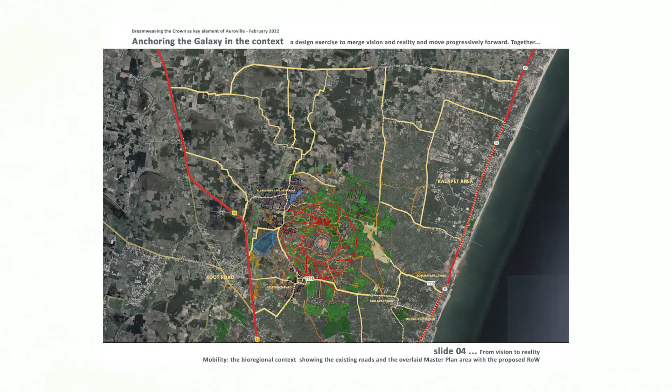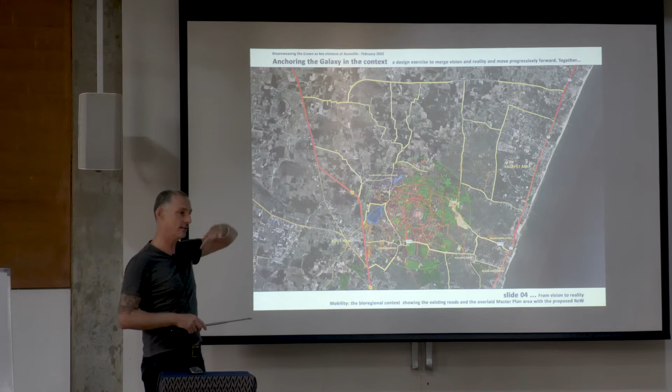When I looked at it, for me it was always kind of sad in a way to see the galaxy being so isolated and not linked with the context. Even in early drawings, you could see there was one northern bypass, there was a southern bypass, and then there were some kind of connects from the outer ring. And that was it. Even in the mobility study of Billinger and all, it was not much more - it was marked, okay, northeast kind of node, northwest node.

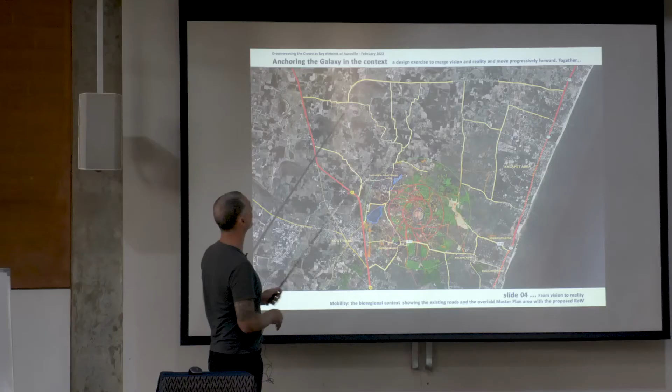So then I zoom out a little bit. So what we have is the highway going to Tindivanam, I think, a largely underutilized main road.

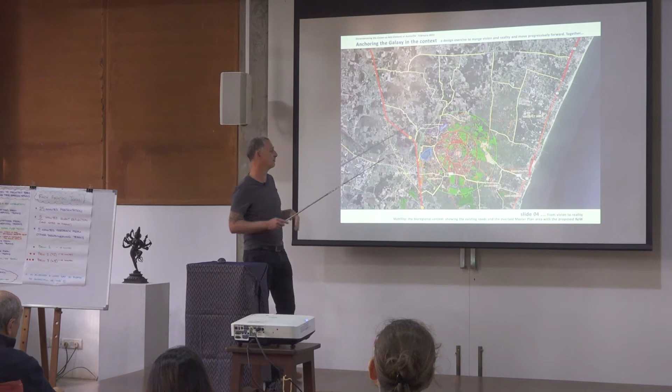We have the East Coast Road. We have from Pudupet up here all the way to Olundayapet, one road which we call the Nessel Road, which by now is really developed, not so much traffic, and this could serve as the northern bypass.

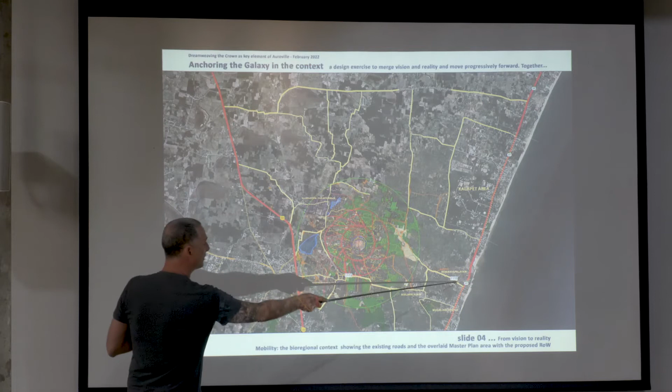We don't have a southern bypass outside of our master plan area. So the only thing we have is the road from Bommayapalayam or Mudaliarchavadi, going through Kolapalayam, through the Greenbelt, touching the city area, then through Edayan Chavadi, to Koot Road, or to the toll gate in Moratandi. We have umpteen roads, and all these yellow roads are already paved.

They go through heavily, densely populated areas. Then we have roads which soon will come, partially already paved here at Udumbu, and there is a large push to develop this. There's one here which goes from Pete to Aragabumi, the road down here to Pondi.

So this is zooming into our master plan area with a kind of imprint of the master plan proposed roads. I hope it's not provocative if I say they are proposed, but that's what's written in the master plan document.

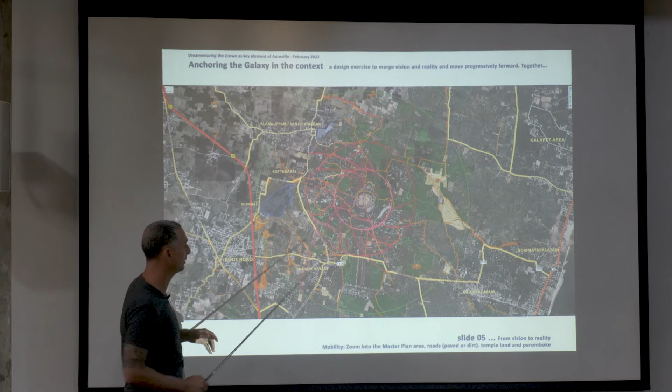You see we have large patches of temple land. Orange is a little bit of peromboke, which is very important to consider because a lot of these roads, for example from here up the Samridi Canyon, next to Arya and all, the road which goes from Certitude all the way to the Matrimandir, these are all roads which are on peromboke. So it's not so easy to just wish them away.

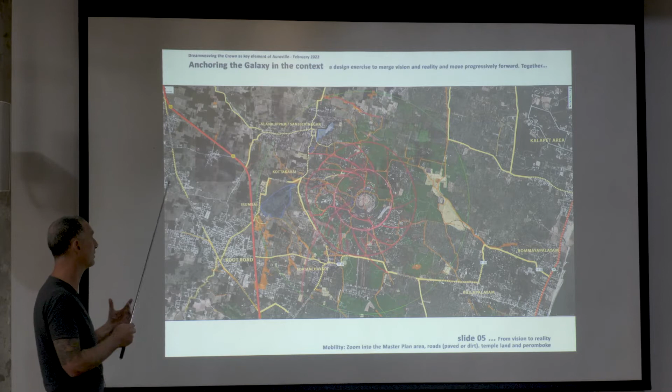For me, the next step in this work was really to look at how I can take this idealized road imprint with the galaxies, with the line of forces, and connect it with the traffic systems, the growth areas, the water bodies, the forest areas, and the land holdings. How can I bring that together and see how much comes out of it?

For me, when I looked at the galaxy, I always wanted to work almost like a Swiss cheese, where you have that perfect round cheese, and then you puncture holes, where there's a village, a lake, whatever, and then you see what comes out. For me, being a planner, that's what's really fun—to see how conceived systems react with the many aspects of life and how they become alive inside.

So this is purely the master plan roads and the line of forces. And then this is something which I will explain next.

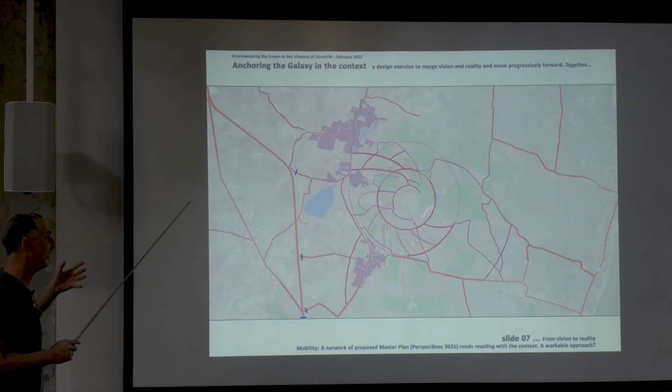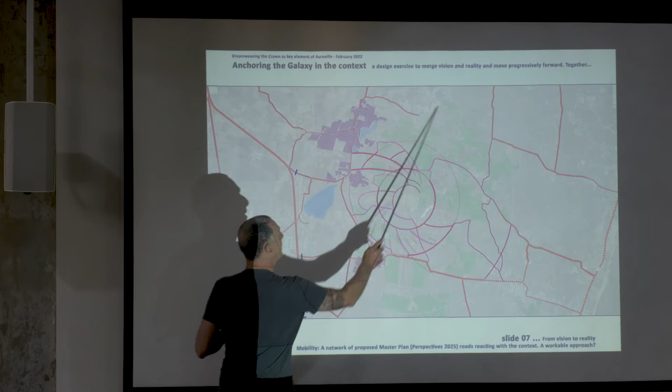If I really look at areas, I see the villages over here, the water bodies over here, the highway, and a large part of our green belt, the regenerative forest work which has happened over here also. So a lot of development is happening over here.

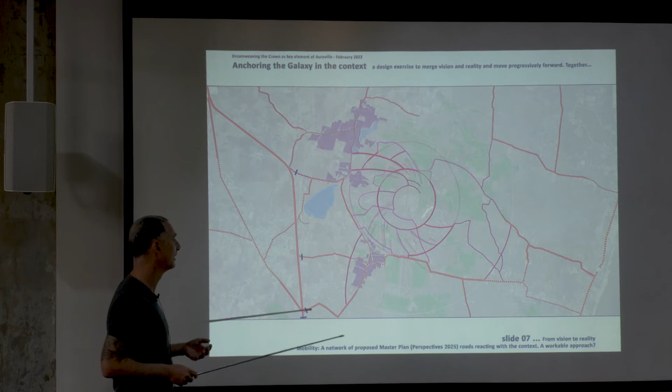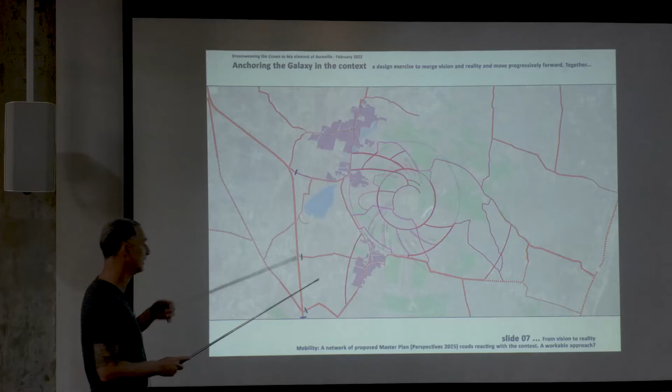So this is something which, again, is a very personal, very unprofessional approach. But for me it's, okay, how can I fuse them? It's always difficult to understand how we have no problem offloading all the traffic which goes to the Matrimandir or the visitor center, guiding it directly through the 2.5 meter wide road in Edayan Chavadi. This has charm, but it's a complete mess. So what can I do to bypass certain areas?

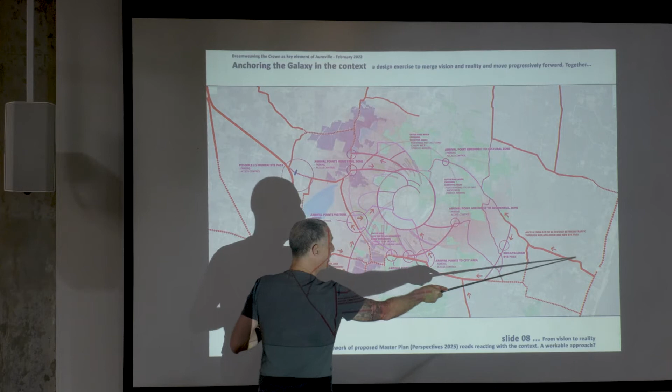So I could imagine that some of the traffic, and we have to think of all the different categories of traffic which are there, that parts of the traffic which come from over here goes— and here we have the outside of the master plan area, mostly not developed land yet, highly sought after with increasing rates. I could imagine some bypass coming over here.

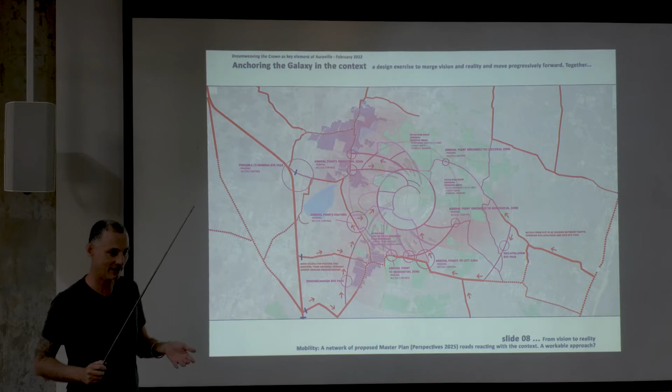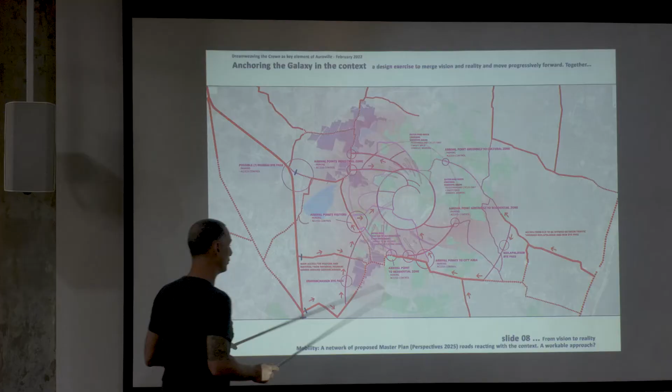I need to take this road as a given. However sad it will be, it is one of the most beautiful avenues in our region. I don't see that the trees will survive the next 10, 20 years—there's just so much pressure on that road already. Here they started widening it. So this road is a given. I could unload some of the traffic going through Kuilapalayam with a bypass road over here.

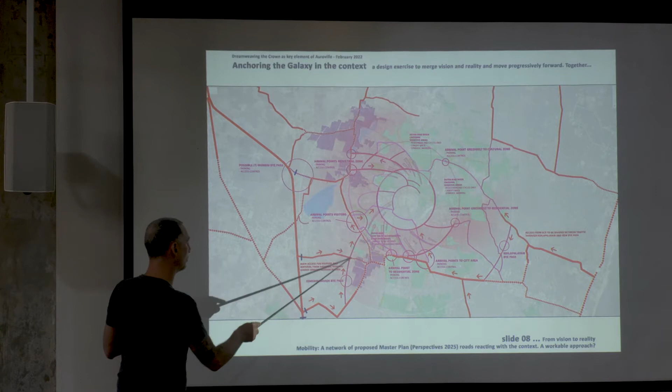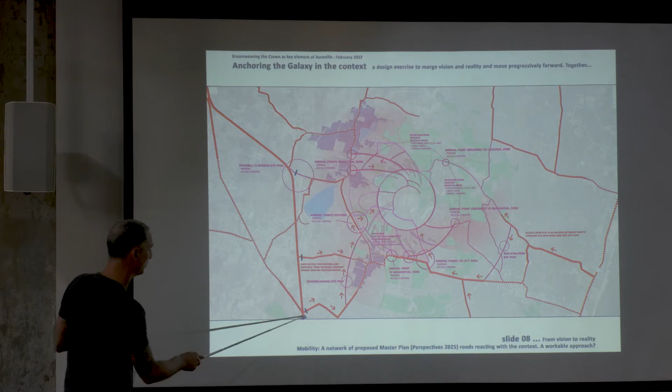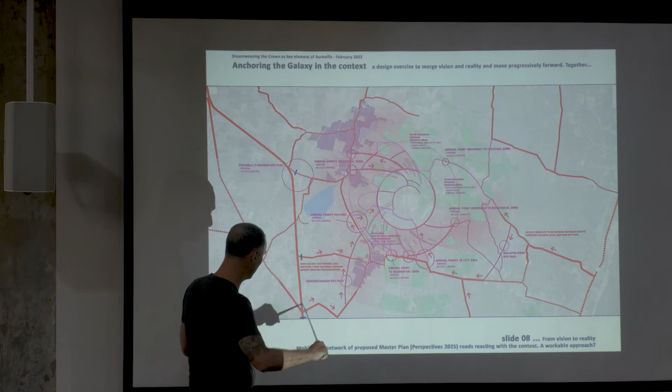I can do the same over here. There is already one node over here which goes to Sanjeevinagar, Alankupam. I could make a small bypass at Irumbai. It could be a very beautiful, very sacred entrance with the temple over here. So then I come over here, the traffic could move. I have a reception center over here.

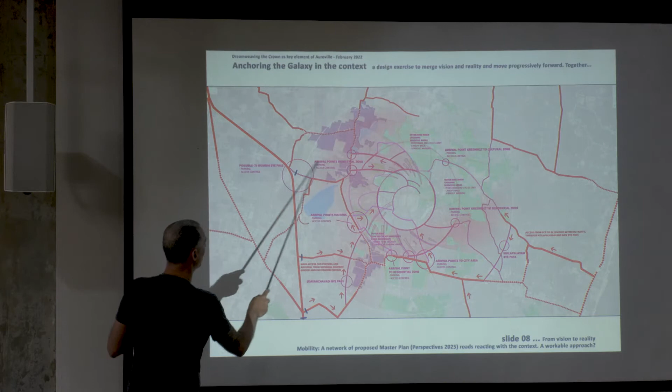I marked it a little bit in colors, the areas where you see a lot of development happening in the future. As it is right now, it falls into place that where we have the chance to increase our forest area or green belt, we don't have much traffic as yet. We have a lot of traffic coming in here with the villages connecting, so here I would just make sure I have very carefully filtered traffic coming in.

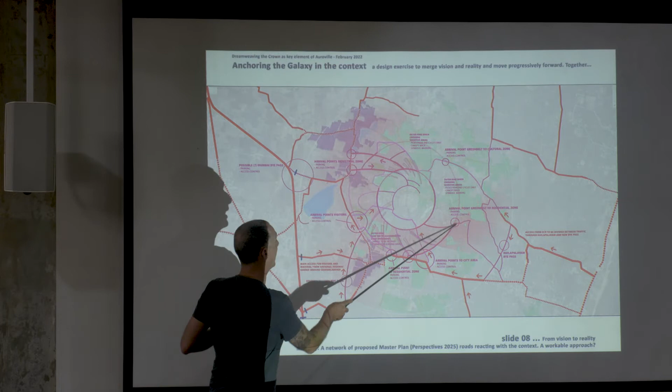I also see that the outer ring is an important part of the whole road concept. So why not try to have it as an imprint on the ground, using it as a cycle path, using it as a tree walk, marked symbolically, not necessarily as your 30-meter wide road.

For me personally, this was one of the key drivers behind doing all of that work, because if I imagine a 30-meter wide road cutting through Revelation, cutting through some Riddy forest, a large part of what Auroville has done in the last 53 years is gone. And it's not only about the number of trees, but it's the destruction of a working singular biotope.

So that for me was the question, but again, where can I work with the outer ring to make it meaningful? We have the chance to bring it over here, and the TDC is working on it. We can do the outer ring here, maybe push it a little bit inside so that on both sides of the road we have Auroville land.

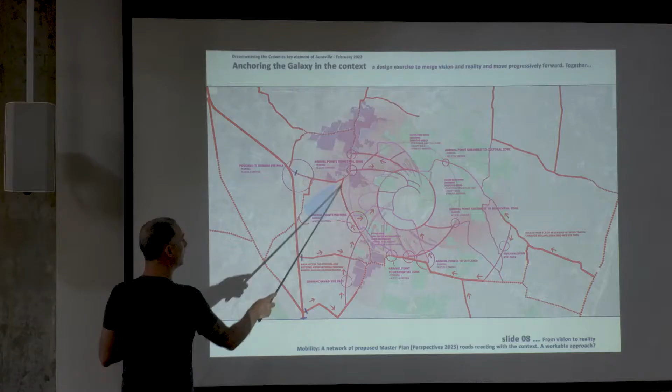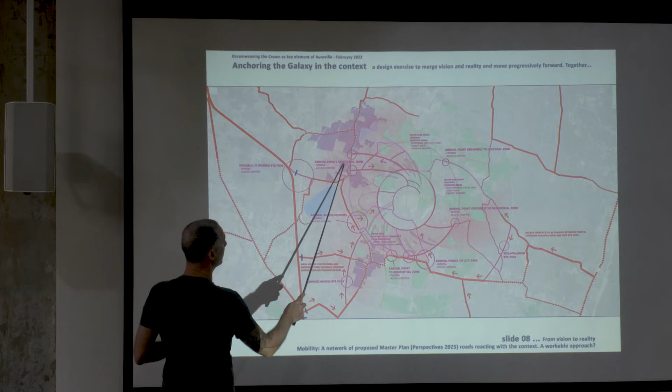Here again, I don't know, is it required to have the outer ring because I have a large traffic over here? Maybe it's just symbolically marked, I don't know. I have the chance to really connect the industrial zone from Kotakarai, from the Alankupam entrance over here, and create a loop road. So with that system, I thought there is a chance of working sensibly, bringing in the required infrastructure, mobility-wise right now, so that the city can grow for the next 10, 20, 25 years.

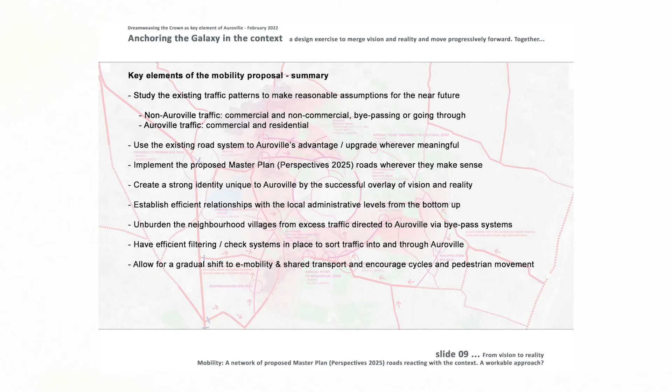So here are some of the key elements of this mobility proposal next. And for me, is it still possible to see the galaxy? I can, and I think a lot of the people who have seen it said similar, yes.

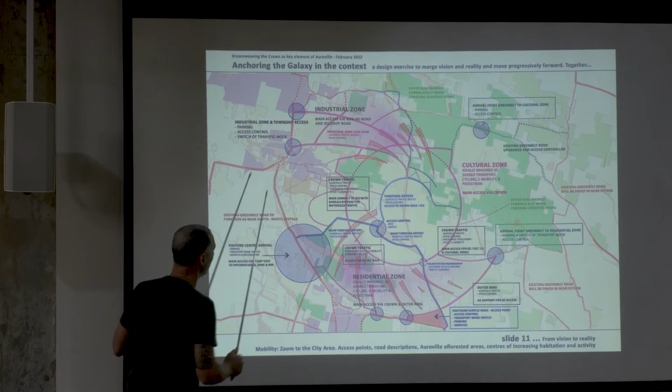You have an access control here at Sukhavati. You have an access control here at Dana. You have an access control here and here. You create that loop. So it's pretty much the same map, but zoomed in a little bit.

This is a key part which will host all the facilities we have to welcome visitors. I think we can't say it—we have, what was it, I think 1 million visitors every year. So we somehow have to accommodate and facilitate them.

I'm not right now debating the Line of Goodwill. It can play a very good role, and I actually like the imprint of it. It's large. We have to see how it's possible, but I think it's a daring gesture. So yeah.

What I do here also - and this may be provocative - but for me, I would keep the existing road that we have over here, the road from Certitude to Solar Kitchen. I would finally acknowledge that this road exists. It's there. I would pave it.

I would also give people who have their private interests next to that road, like Muddy and his sons, or whoever else is over here, I would give them the chance to be integrated into Auroville.

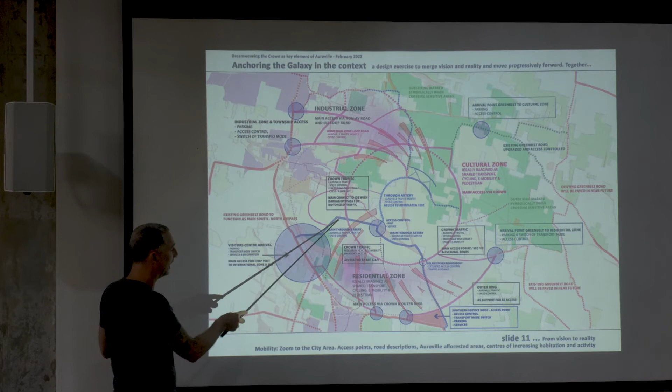Why not? So from here, the road is paved, I can use it very well. And with that, I can connect around the lake, which comes whatever shape it will take. I have my traffic much more controlled, much less Auroville internal.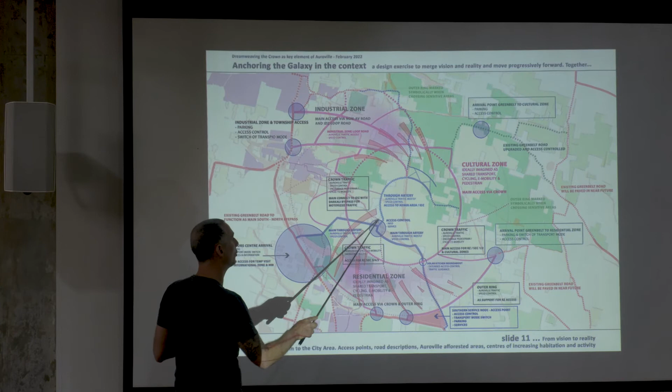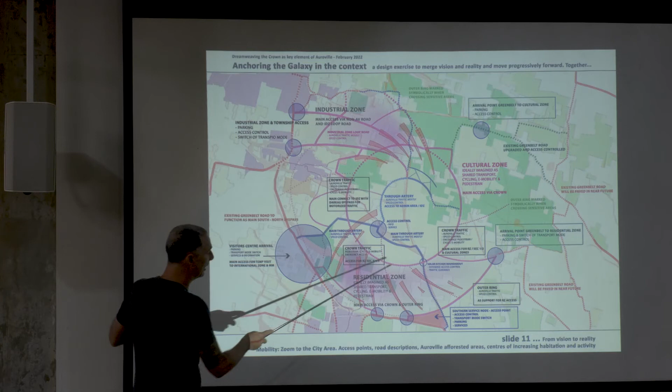I have here the traffic going on the crown, the cultural zone, in my imagination, being much more inward looking, much more focused on e-mobility, slow traffic, pedestrian. So I would see a gradual decrease of traffic over here.

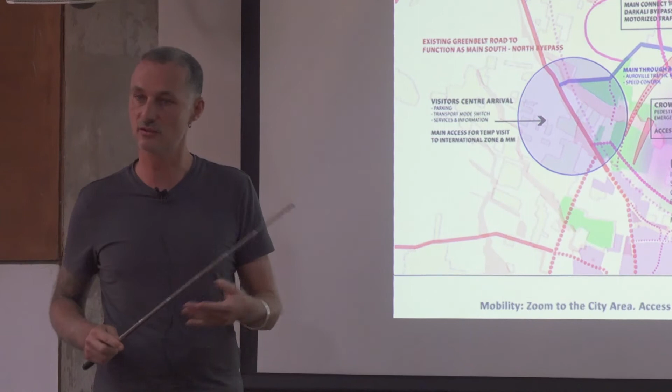Again, the main traffic is here, and it takes into perspective that ideally within the next 10 years we all switch to community transport, e-mobility, away from fossil fuel motorized vehicles. And then it really focuses in on the crown.

So you have, wherever, I have the Solar Kitchen roundabout here, I have the Vikas radial, here I have the end of the residential zone, sector 1, I have Kalabhumi.

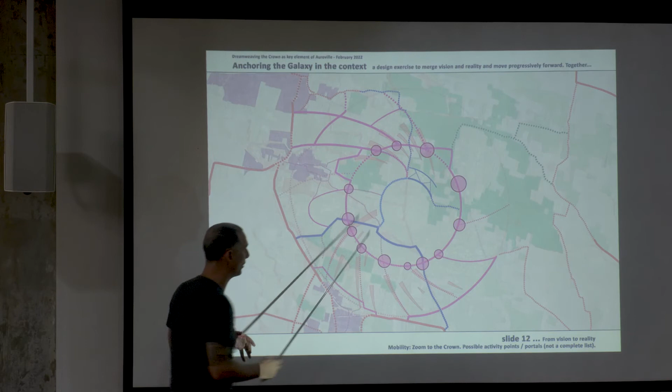So I could create on the crown, with its changing character - for me the crown is not a 16.7 meter wide road necessarily, which is uniform, cutting all the way around through that center. It will change depending on what zone it goes through, if it crosses a green corridor.

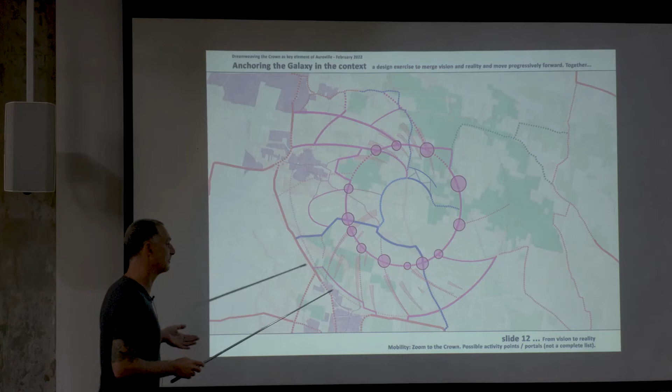If it's largely for internal traffic, if it's industrial traffic, for example here where I have the land owned by Michael Bonke, or when it crosses Darkali, I would just see it as infrastructure going through a service road, either on the ground or floating above the canopy. The same here in Bliss.

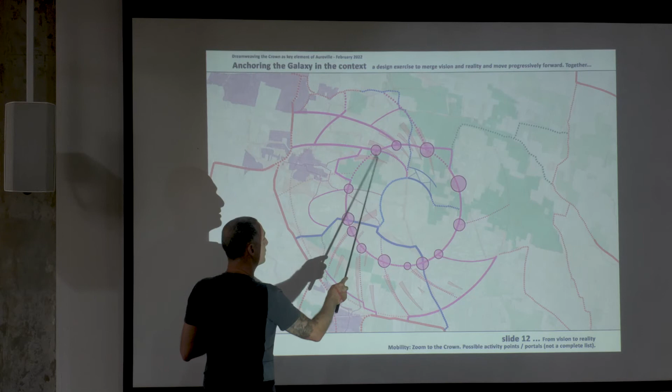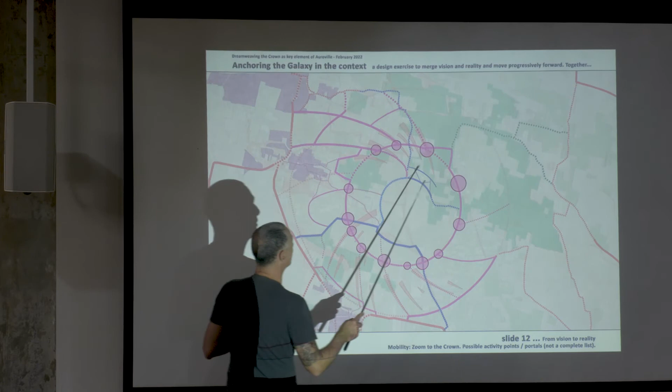Now we've created conditions so the high tension line goes in, but still the main traffic which wants to find its way can go on the existing road, which then goes further to the Dana Road and connects to the Greenbelt. So I could have a cultural zone plaza here where people meet, play, performances.

I have further access to the sports areas. I have an Auroville Youth Plaza with cultural facilities, info on youth activities, green work, expo, a transportation switch.

I have the residential zone plaza, and I think other presentations will focus on that area, where I have a large change from individual traffic, if I don't do it already here at the Southern Service Node. So I have all these different plazas, which, to borrow one term, could really become the jewels on the crown.

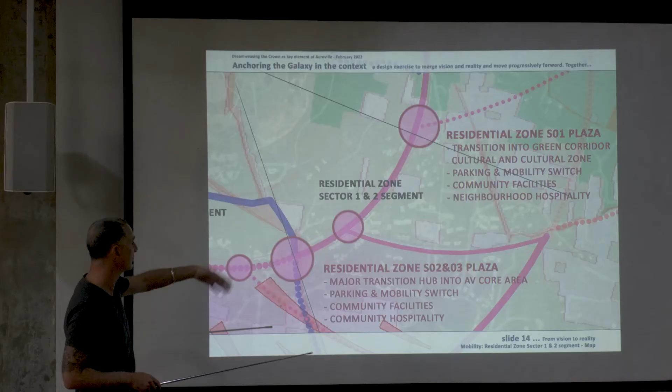So what I then did in the next section - it's all just a focus in, and that's still a lot of work to be done.

I don't know how many of you looked at the presentation of Lata and Prashant, which divided the crown into 8 segments. They analyzed the topographical part, they analyzed what are the boundaries, they analyzed the hydrological state, and then gave recommendations on existing and proposed use.

So I just copied it because I don't know how much it's been shared so far. I just wrote down what they did because I think it's already a really good - both of them are town planners - so it's already a really good kind of guideline catalog of what is and what can happen in the next few years.

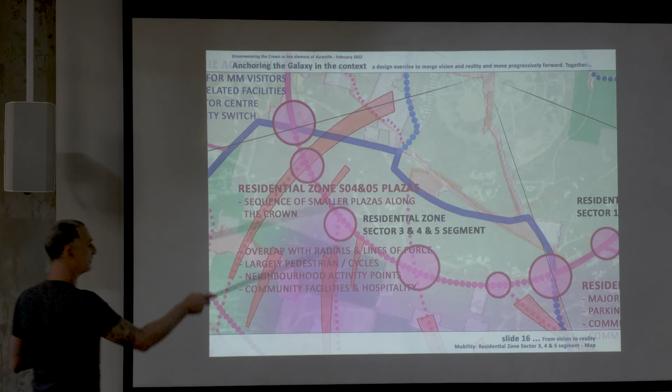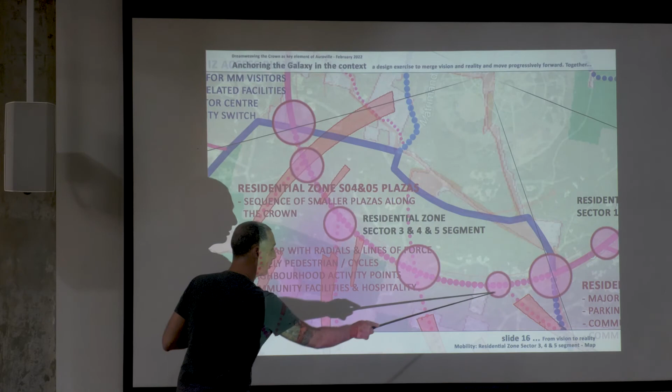So the same here, we have the residential zone, sector 3, 4, and 5. The large part of the traffic could go around here, which makes this part of the crown, like the Crownway study, a very Auroville-internal, slow traffic community space - pedestrian, cyclists, e-mobility. Of course you have delivery for PTDC and other facilities that come up here.

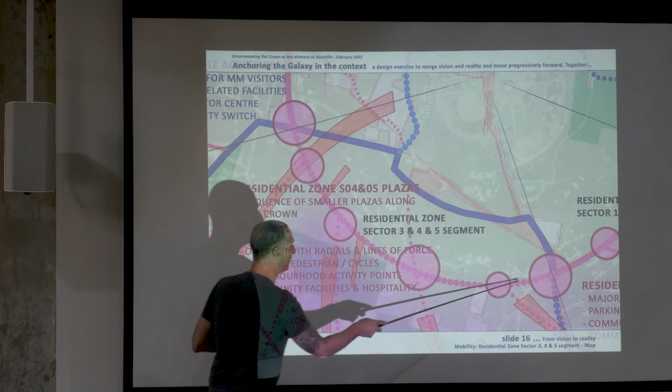And I could have a really beautiful chain of small plazas wherever they overlap or where I have a point of interest. And I can have neighborhood activity points, community facilities, tea shops, hospitality, health facilities.

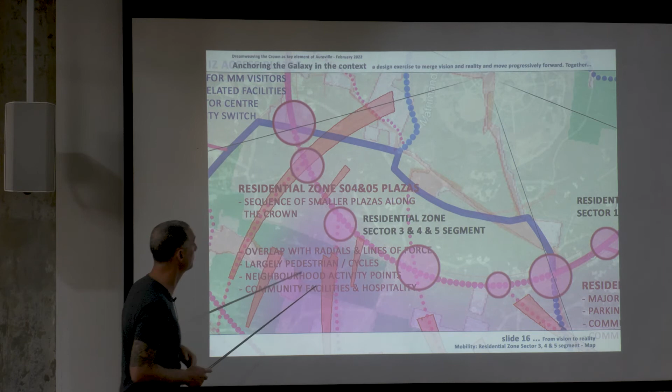Then I come to the international zone segment. It was a long debate why I have here this loop road.

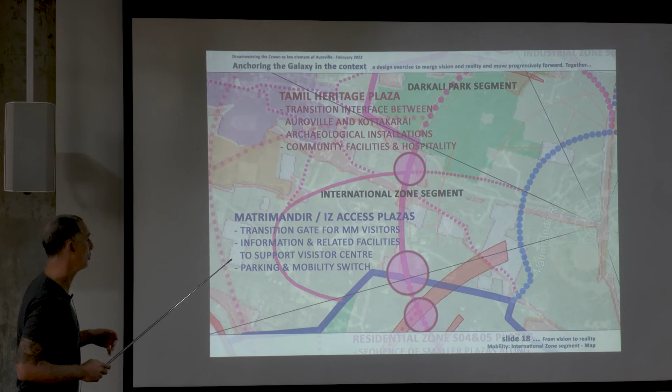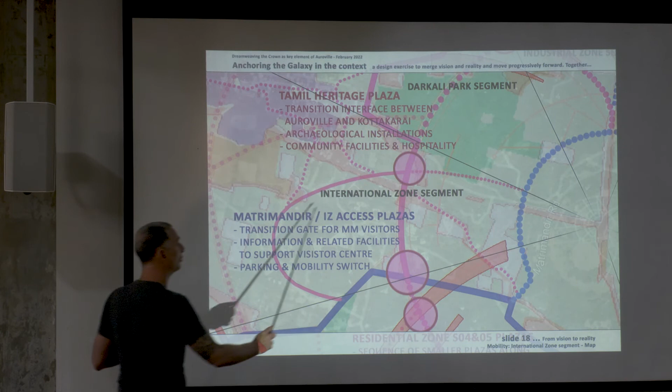Is it a master plan road or not? I think why not, it's a good road. People have been working on it. It seems a kind of logical access part of the international zone. It could extend here towards that road which goes around the lake.

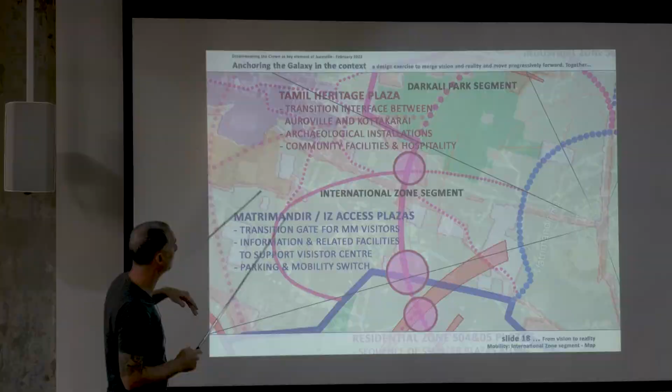Here I have a very interesting plaza where a lot of people come in from Kottakarai, Bharatinagar. I have archaeological findings over there which could really be nicely exhibited.

Then I come to the Darkali Park segment. For me, it's really unthinkable to bring in the traffic. I've shown in the next slide, just keep it there right now, how Darkali stewards have thought about how it can be done. So for me, what I thought is the traffic, we have the existing road over here. I have the Kali temple.

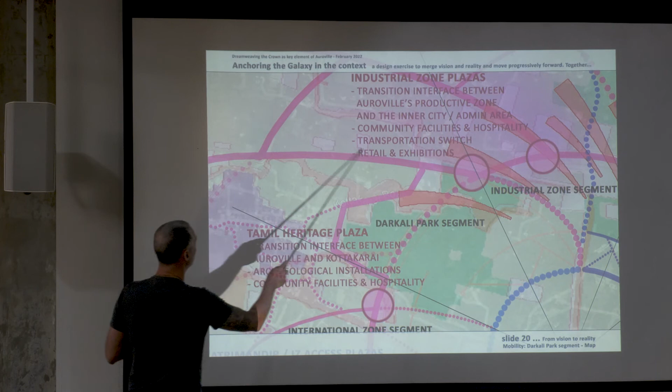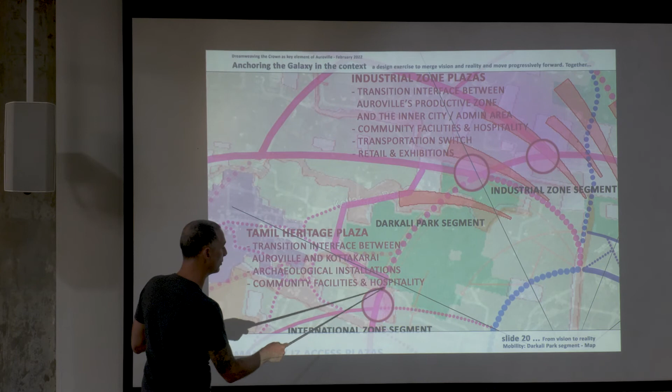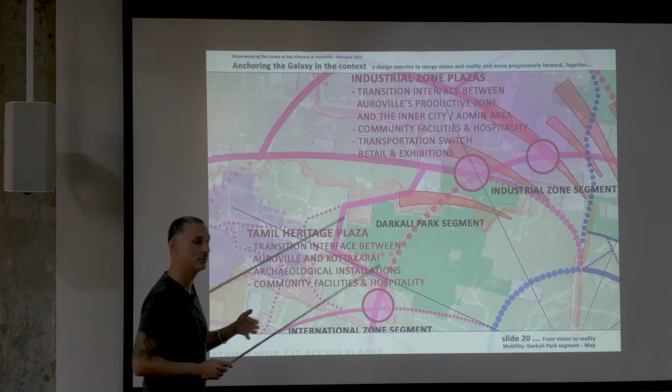I could use part of that already paved, quite beautiful road over here. And then instead of going into Kottakarai, I could develop a road along the fence of Darkali and then come back and join the crowd at the Crown at the language lab. And then only I have the infrastructure going through this line of force. One has to see how it develops, and I think other people in our group looked at it.

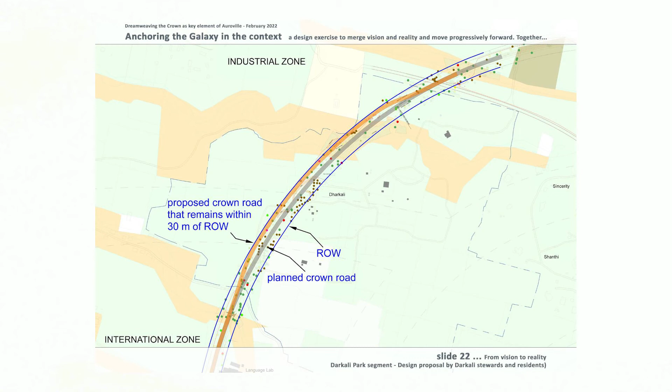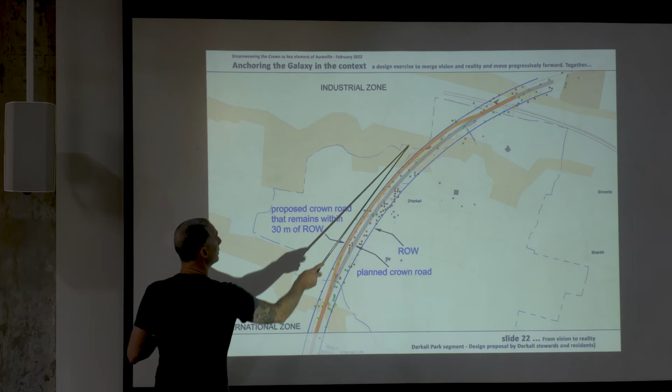Is it a full building? Is it something else? So this was one of the proposals of Darkali, who have been really working on this, to highlight that people have individually also been working on looking at their areas of interest. So they have been working here trying to find a way of how the cable and a kind of access road could go through Darkali.

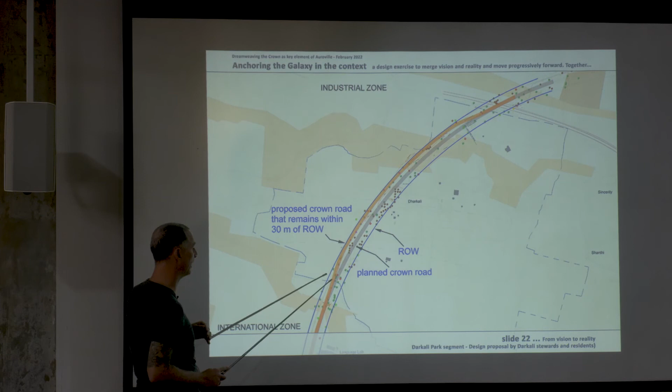The parameters of TDC have also been changed over the years. Bypassing the water bodies which you have over here. These were different options which they did under pressure. One is just to find a way and just to collaborate and see like, hey, how can we protect what we have created here?

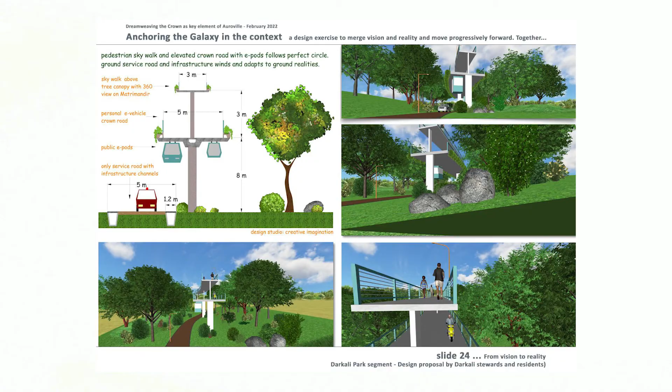What it has is a benefit which is really unique. So you could have an idea, you have a working thing, you have an access path on the ground, ideally following that prepared road already. You could have a motorable way on top with some loop public e-pods. You could have a skywalk above the canopy.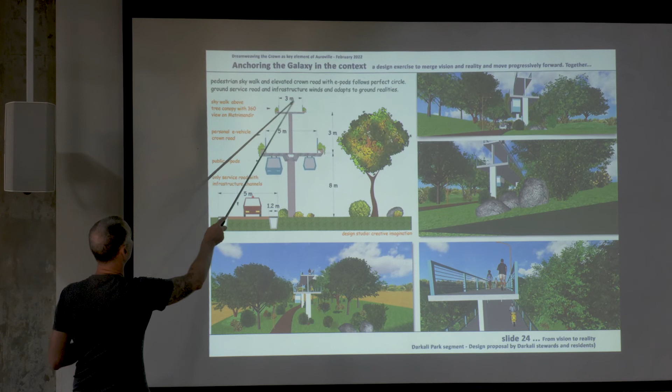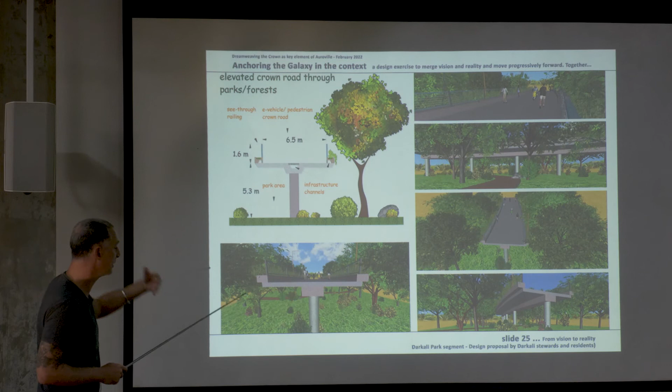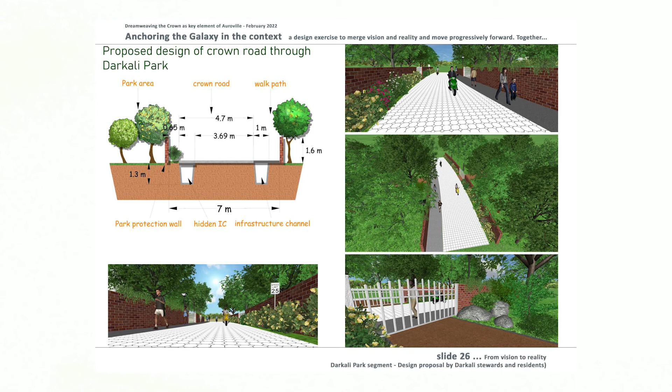Then downgrade it a little bit. You have just your common flyover. Again, you would have to define what comes, but it still allows the wildlife to continue. Or you go into the most grounded version, but then you need to see how do you protect it. So then we come, this is the industrial zone.

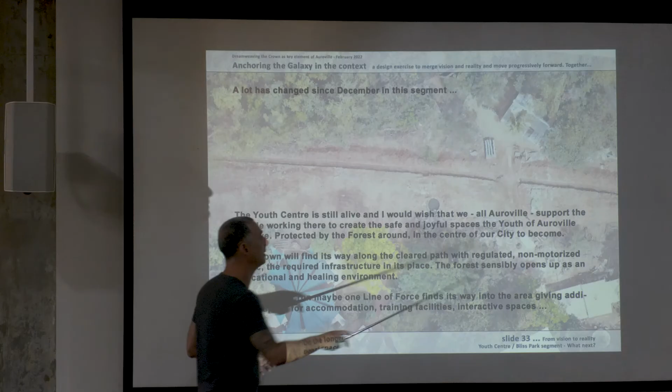Then we have the YC. So there were already a lot of proposals done by the YC and the people from Bliss. And I think even though it has been cleared and the infrastructure has been laid in a circular pattern, you still can do a lot around it. We still have Bliss Forest, which is not just a thorny woodland, but you have really beautiful species of trees.

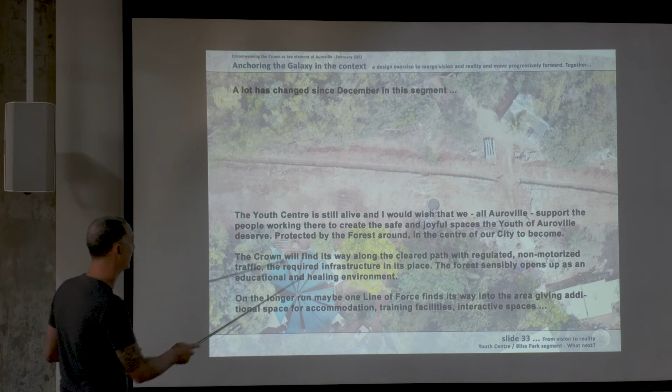We could open up the forest, create arboretums, forest walks. You still have the stage area, the youth. I think we really have the responsibility of helping and supporting the youth to recreate these safe and joyful spaces that they deserve, protected by the forest in the middle of the city, and the Crown will find its way.

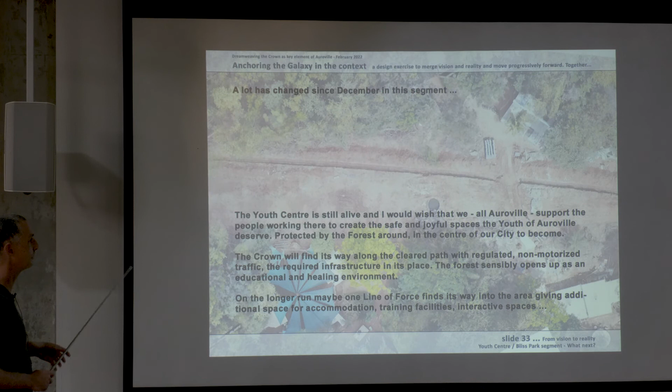So again, it's all about the need to have these DDPs. This is then the cultural zone segment where I think we have this beautiful space, Kalabhoomi. It could extend, it could connect to the sports facilities over here.

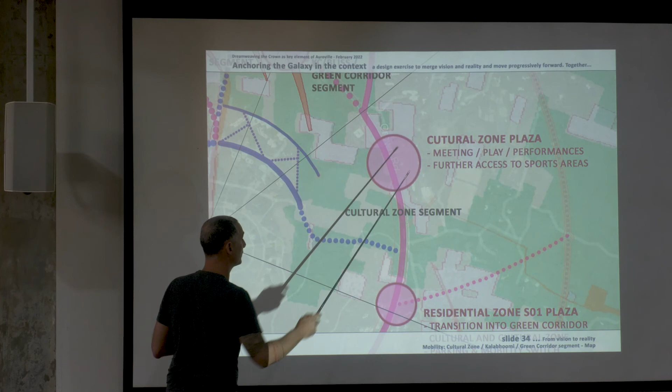So what next for me is to collect the feedback, not only the positive, which I think is the point of the Dreamweavers to only give positive feedback, but I'm happy to hear critical feedback. For me, very interesting would be to look at the aspect of infrastructure beyond mobility.

Is it really required everywhere to have so many lines? Is a centralized system stronger than a combination of centralized and local systems? What is more resilient? I think resilience is for me one of the key words any city has to deal with. I would be happy to hear tomorrow what really is required in what given space, see how other Dreamweavers are working on the ground, see what can be the next steps, and then work with interested stakeholders in some of the more sensitive areas. That's it.